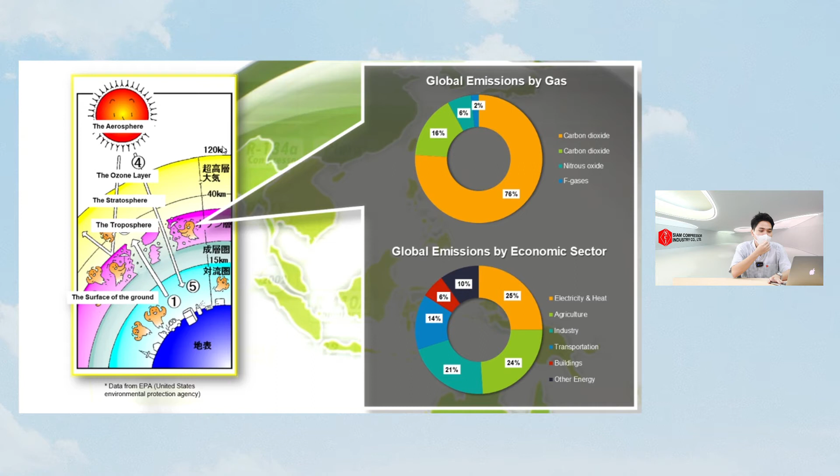Refrigerants are classified into different groups by their chemical composition. These are fluorocarbon and natural. The eco-friendliness of a refrigerant can be measured by its ozone depletion potential or ODP and global warming potential or GWP. Fluorocarbons are synthetically produced. The classification also depends on their chemical elements: chlorine, hydrogen, carbon, and fluorine.

The first one is the ozone depleting. CFC and HCFC refrigerants were widely used in the 20th century. However, these refrigerants are being phased out because it was discovered that they have both high ODP and high GWP. For non-ozone depleting, there are HFC and HFO. HFC is widely used today, but it has a high GWP.

HFO is another preferred choice, which is categorized as having zero ODP and low GWP, offering a more environmentally friendly alternative to CFC, HCFC, and HFC refrigerant. If we talk about natural refrigerants, they have a low GWP and are efficient, and we expect them to become popular refrigerants soon, though safety will still be a limiting factor in regulating the usage of natural and some HFC or HFO refrigerants.

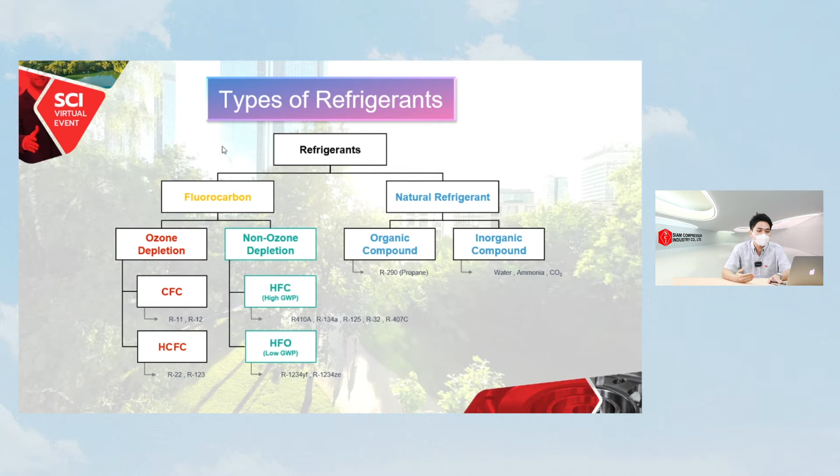Moving to the historical cycle of refrigerant. Actually, it all started with ammonia. It was first used around 1834, but because it can cause fainting, it was phased out of home appliances. Then safer artificial options called F-gases were developed. The first generation were CFC and HCFC.

In the early 1970s, scientists noticed a giant hole in the atmosphere. It was discovered that CFC and HCFC refrigerants cause a breakdown of the ozone layer. Therefore, we could mobilize the parties to agree on a strong ozone protocol. Consequently, the Montreal Protocol was established in 1987.

In addition to reducing the ODP load in the atmosphere, the reduction of CFC emissions had also considerably decreased the global warming impact. Substitute refrigerants called hydrofluorocarbons have zero ODP and medium to high global warming potential. However, their GWP is still lower than the phased-out CFC type.

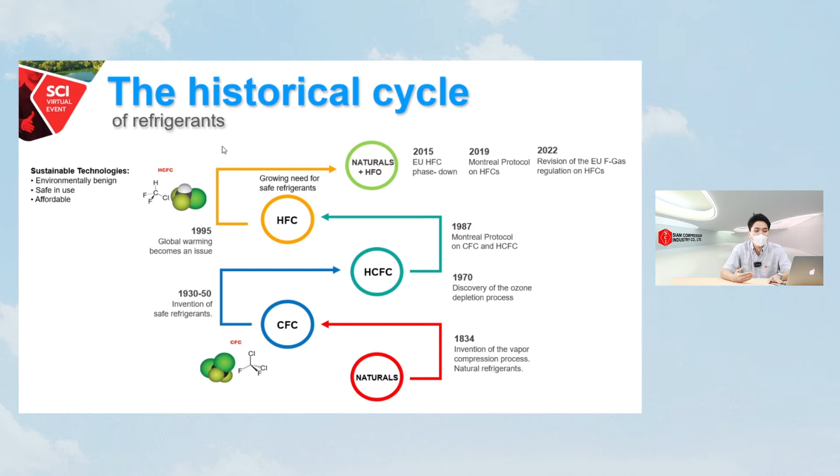Here we see an overview of the HFC phase-out steps. The Montreal Protocol now has two categories to control ozone depletion and global warming potential. It is worth mentioning that developed countries are called non-A5 countries, while developing countries are called A5 countries. A5 countries are divided into two groups. China belongs to the early group represented by the black line, while the brown curve represents India and Middle East countries.

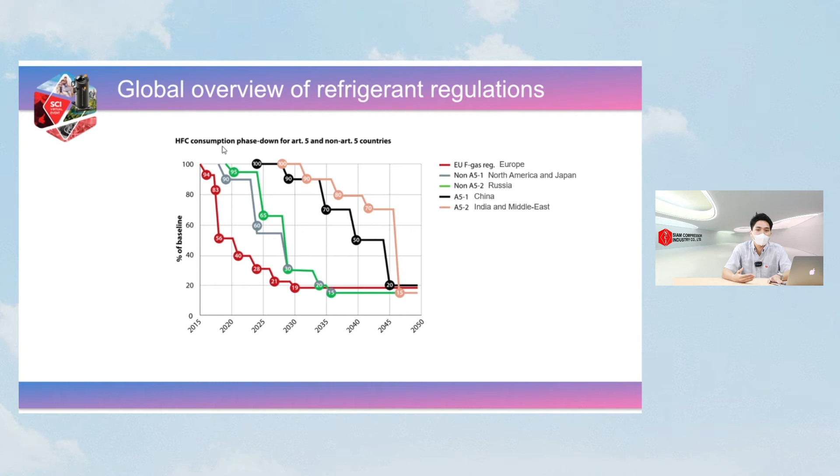The non-A5 countries are also divided into two groups, with a gray curve representing the North America countries and Japan, and the green line curve standing for Russia and many of its neighbors. The EU phase-out is represented by the red line and has already begun. The EU phase-out will not be affected by the Montreal Protocol phase-out, since HFC emissions have already decreased by approximately 40%.

Here is the broader overview of the refrigerant. If you look at the applications that currently use R410A, you can see that there are many opportunities to substitute this refrigerant that has a GWP value of 2,500, and it is considered a base refrigerant. For example, R466A is a close match to R410A in terms of efficiency, cooling capacity and non-flammability. But the complicated production of R466A means it will not be a cheap solution.

Therefore, it seems likely that high-pressure systems will move to A2L refrigerant. There are already opportunities in the market to substitute R410A with low GWP refrigerants, such as R32, R452B, and R454B, that need to be carefully designed into the system and carefully handled by installers.

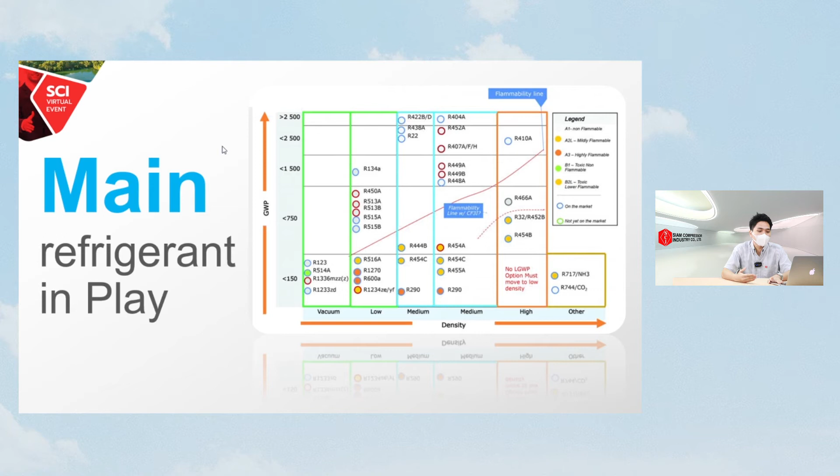We believe that a long-term sustainable refrigerant solution is the key. We consider 6 main parameters that must be aligned to accomplish a real sustainable balance. When choosing a new refrigerant for an application, all 6 parameters must be considered together to achieve long-term and sustainable results. It is important to look at the many underlying parameters such as maximum unit efficiency, safety, climate change, ease of conversion, ozone layer protection, and efficient use of resources.

We are focusing on lower GWP refrigerants. R32 and R452B have the same level of GWP value, but if you look at efficiency and economy, R32 stands out as the best alternative. Refrigerants with ultra-low GWP will be important in the long term. R454B is another choice, even though its efficiency is slightly lower than R32. To be capable of developing new sustainable solutions for the new refrigerant, SCI has developed a model that includes all the main parameters.

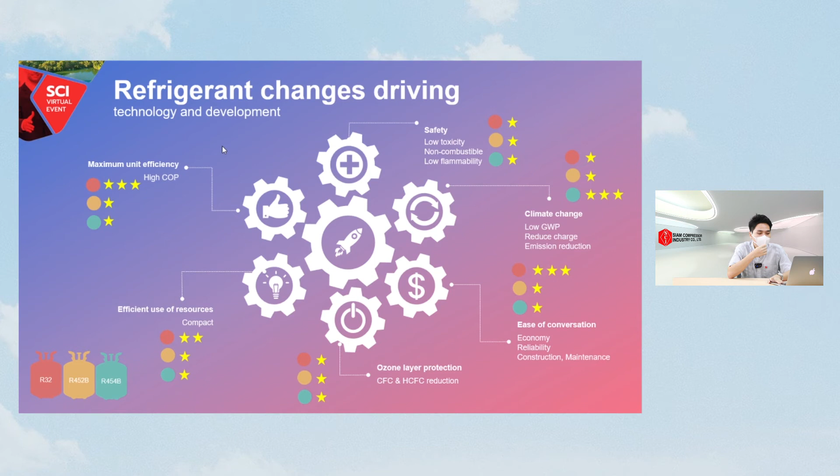We will discuss the way forward, focusing on exploring the refrigerant group and application. What is going to happen in the near future for the air conditioning sector? RAC or PAC and VRF systems will gradually shift away from using R410A and toward R32, R454B, and propane. A2L refrigerant is expected to be used in higher capacity, but needs some safety endorsement. For bigger systems such as scroll chillers and rooftop units, a similar transformation to A2L refrigerant is happening. The efficiency and capacity of equipment using a new refrigerant like R454B is also good, equivalent or even better than when using R410A.

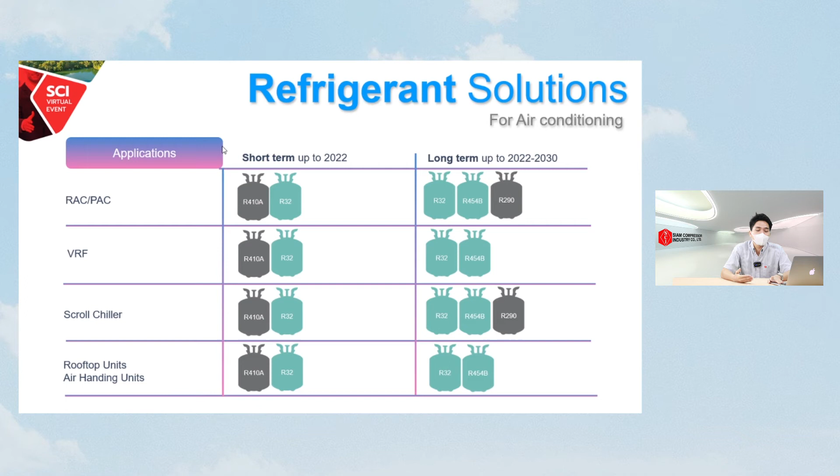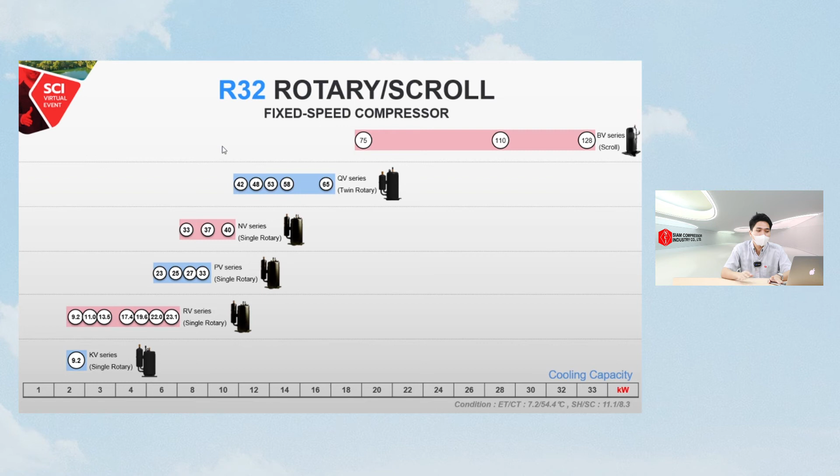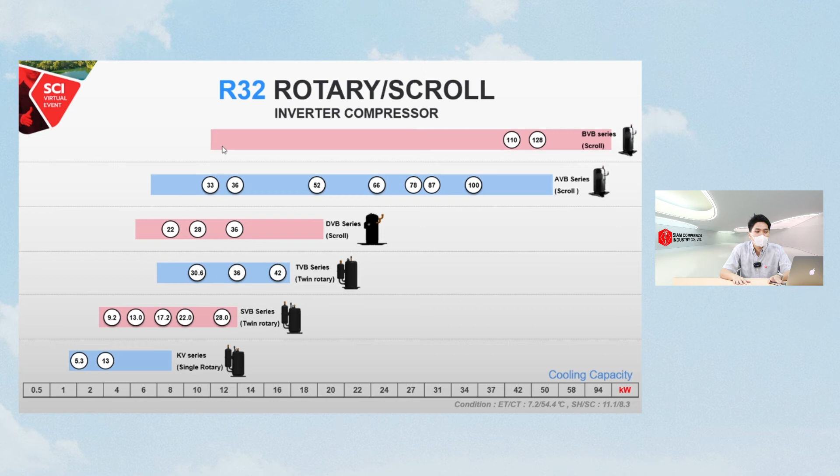Before we end the presentation, let me introduce the product lineup of SCI compressors. R32 became a popular refrigerant for air conditioning. We have a wide range of capacity for fixed-speed compressors. Starting with the rotary compressor, its capacity starts from 2 kW up to 18 kW. For the scroll compressor, its capacity starts from 20 kW up to 35 kW. And then I will show you the R32 inverter compressor lineup. The capacity starts from 1.5 kW up to 18 kW for the inverter rotary compressor, and 6 kW up to 100 kW for the inverter scroll compressor.

Referring to research giving a broader overview of refrigerants, R454B will become another popular refrigerant in the near future. SCI also has rotary inverter compressors which are compatible with this refrigerant, with capacity ranging from 1.5 kW up to 15 kW, and 2 kW to 35 kW capacity for the scroll compressor.